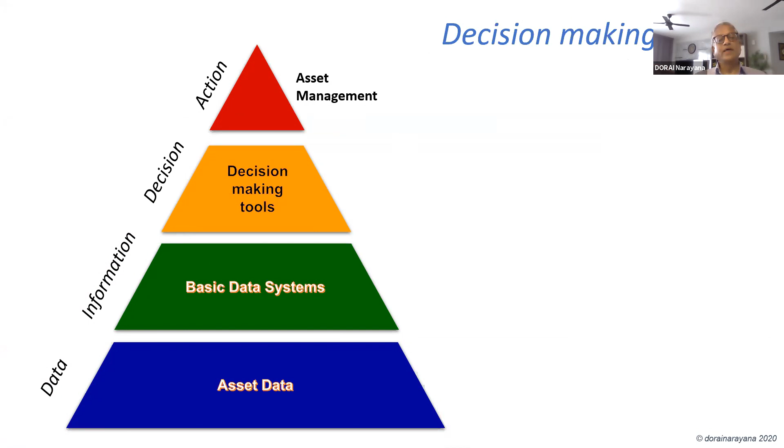And the timing of that demand was coincidental with the enhanced digital capability that also came up because of technological improvements. And then the journey that followed is this. People had this decision-making challenge of taking all this data that was available and having some kind of a data system to organize it and present it in a way where you could make a decision. Then some decision-making tools were developed, and that helped them to make the decisions and move on to action.

But several issues cropped up. Data was not fully available as they wanted, so there were a lot of gaps in the data. And there was also data that was not complete, or that was not reliable. So they had these shortcomings. And in that, they started to look at data acquisition, and that again costs a lot of money.

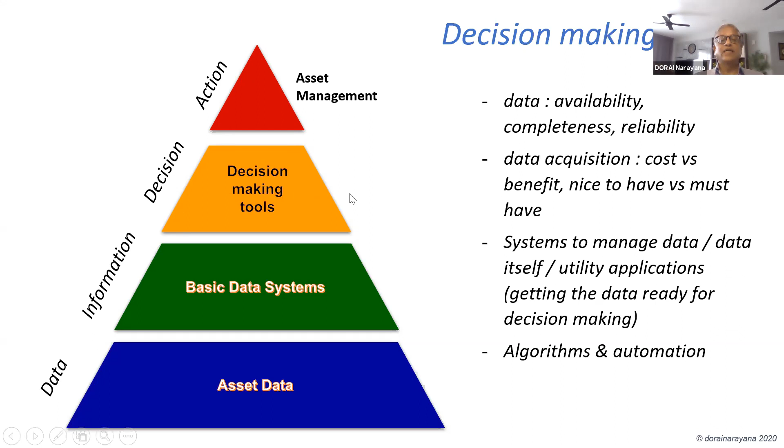So they had to make a call. Do you want to have so much data? Is it worth spending the money to do it? And then they start differentiating between what they must have and what is nice to have. Then they started developing systems to manage the data and utility applications, getting the data suitable and ready for decision making. And of course, the final steps were the algorithms and the automation that then resulted in either the decisions or the action.

And this was a journey that I also went through in the organizations that I worked for. Initially, it was basically transferring the available information from traditional media, paper, drawings, from people's memory into some kind of digital media, scanning, digitization, and so on. Next, there were systems to acquire, manage, and transmit this information where required. Some analysis tools, and then linking and integration of different types of information, different types of databases.

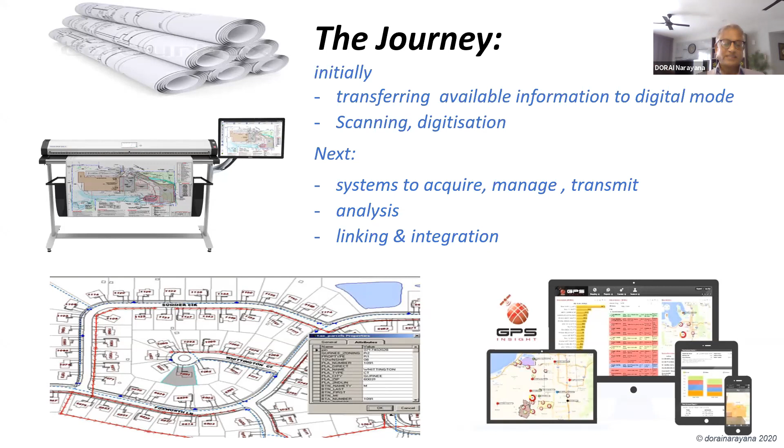And then it became much easier. You could search and retrieve what you wanted quickly. You could send the data to the remote locations where it was required. And there was also the possibility of visualization, so you could present the data in such a way that it could be easily looked at and make a lot of sense to the user. And this is an example of a GIS map of a sewer network.

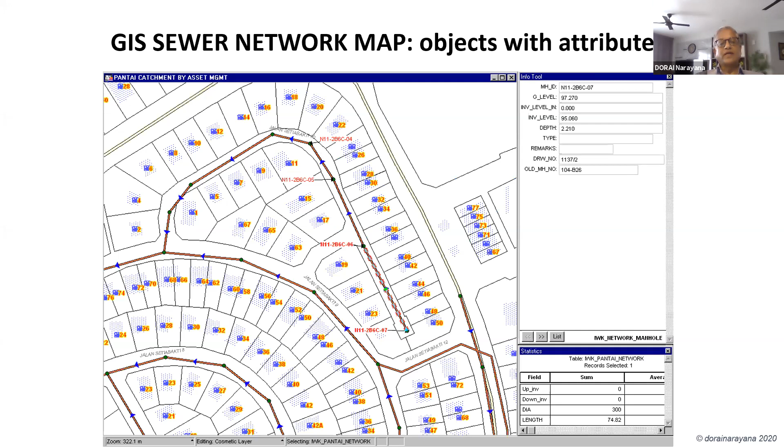As you can see, there are manholes and pipelines and also houses which are connected, house connections. And you could click on some of these to get attributes. You find out what the diameter of the sewer is, what material it is, and things like that. So this was a basic form of a tool to visualize the data instead of it being in a table form. You could also have GIS in the form of layers, split that information into different layers and overlay them in different combinations. And these become a useful tool for planning.

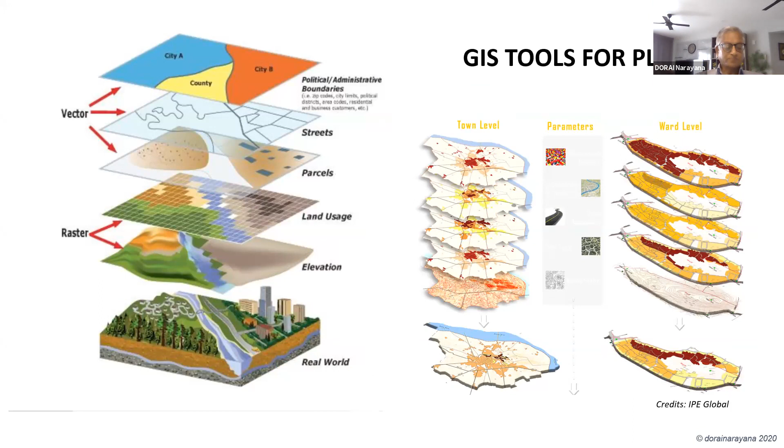Now, from the silo organization of this information, they started linking this map-based data to other data. For example, in our organization, we had asset information on all our sewer lines, our sewage treatment facilities, and so on. Maintenance information on our equipment, on our sewers, billing information, customer complaint information, performance data. All these databases, which existed in silos, got integrated together with the GIS map and made available to different users in formats more suitable for them.

And when we did this, we started finding gaps in the data, some information we'd like to have, which makes the information insufficient to make the decisions you want. Then a data acquisition stage takes place. For example, what is happening inside the buried sewer pipe. So we have CCTV, a camera which is sent through the pipeline to gather information. It records a video, and that information is then translated into a form which makes sense for the decision maker.

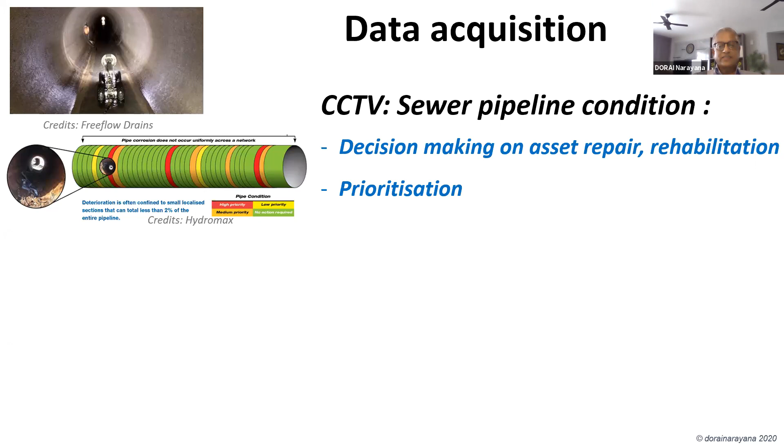In this case, you can see it's a condition assessment format where the red bands are where the sewer pipeline is undergoing some degradation, cracking, or structural issues, and the green ones are those which are okay. This makes it very easy for the person to visualize this information and make decisions from here.

Then we have underground utilities, which again are hidden, and these are required for construction and also future maintenance. These are gathered using various technologies like electromagnetic techniques, ground penetrating radars, lasers, and other things. And then a three-dimensional underground visualization is possible.

Nowadays people are also using BIMs, which are building information models, to see an underground model of the area that we are interested in, to see what is below the road. So these were all data acquisition tools.

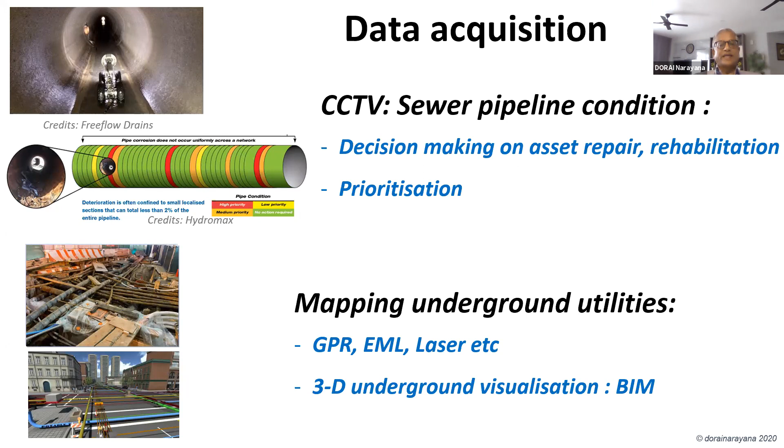Then it also became possible to transmit information using wireless technologies. And that meant that unmanned sewage treatment facilities which are remote could be linked up with some sensors at the key locations, key processes, to a centralized control point where you could get an early warning of anything that is not working right or anything that may need some adjustment, and the team could be sent there instead of having the team there all the time.

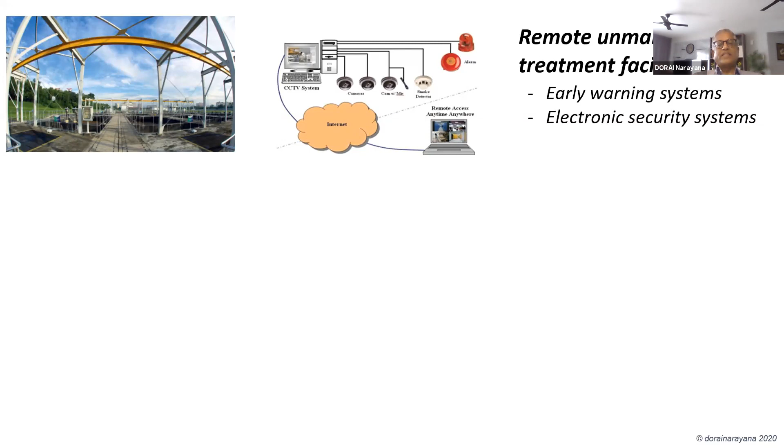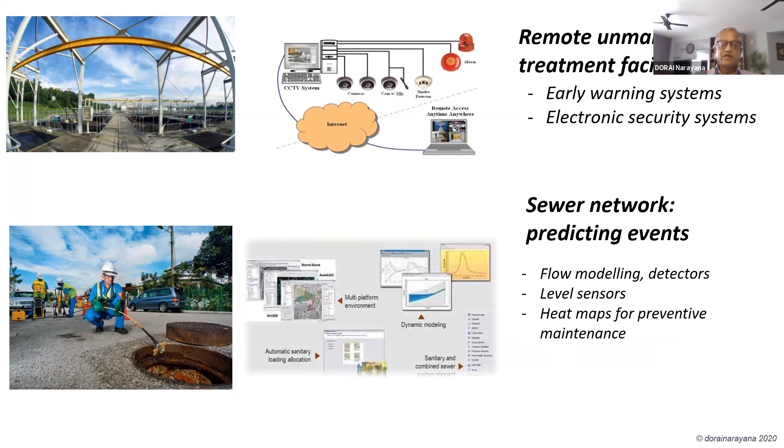Electronic security to alert on possible people who are going in there, unauthorized entry or maybe theft. So these are also possible here. And the sewer network again has similar. So you can have a level sensor, and from there you can collect information about flows, blockages, and things like that. And over time, as we get more information about the possible problems that are happening, you can develop a heat map. And these heat maps will show the priority for preventive maintenance of your sewer network.

For process control efficiencies, there are several technologies which have been used, SCADA, which are remote controls, dissolved oxygen meters, flow meters, and so on, which are able to gather data on a continuous basis, and some process automation can then be carried out, where the algorithm decides to adjust process parameters and so on. And real-time performance monitoring is also possible.

In the case of Malaysia, we have a very large number of small sewage treatment plants which are dispersed all over. And we had come up with a risk monitoring framework using various criteria. And from there, an asset risk monitoring map could be created. And then our operational focus can be decided on that basis, which are the plants which are most critical and which require more attention, and which are the ones which can be left to run with some minimal supervision. And maintenance strategies, preventive, predictive, and even now prescriptive maintenance is possible based on the parameters which are being measured. And our CapEx plan can be adjusted to give the maximum impact to the performance of the asset portfolio.

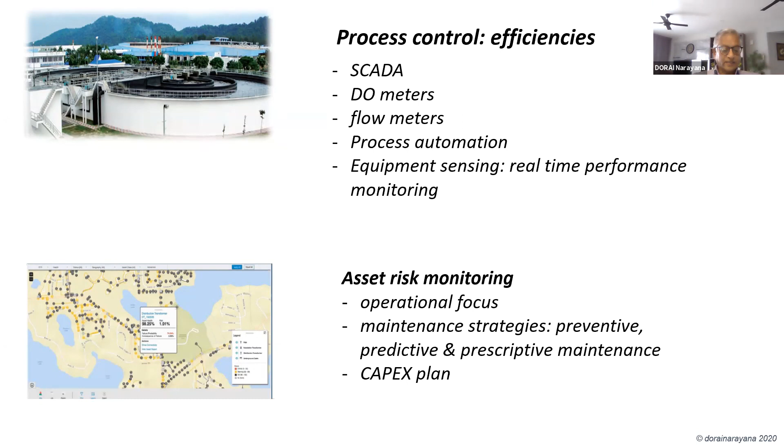Customers are also linked to the assets. We know which customer is linked to which part of the sewer line and to which sewage treatment plant. And that enables us to have better communication with the customers in the event of any breakdown or any problems that are likely to affect that customer. The communication could be sent to the concerned customers, and some preventive methods could also be carried out. Our billing strategies could be improved. So this has helped by having this method of linking customers to assets. And this was an initiative that we carried out.

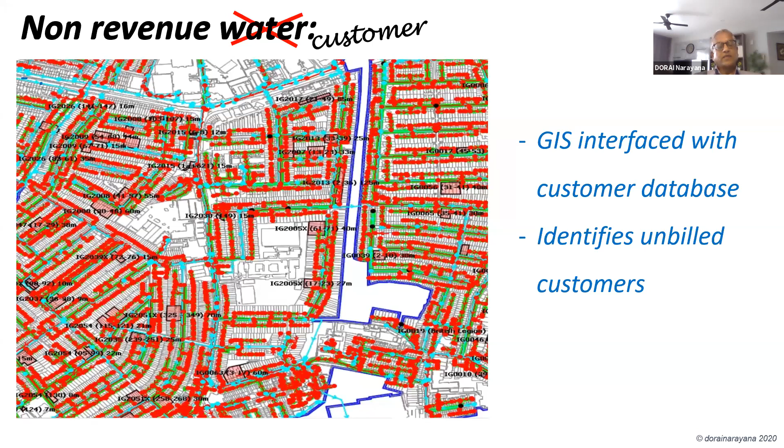We all have heard of non-revenue water, but we called it non-revenue customer. And these were customers who were receiving service. They were connected to the system, but they were not in the billing database. So a GIS system of the service area overlaid with the customer database can identify which are the customers who have been left out of the billing process. So this resulted in many millions of unidentified customers being billed, and the revenues were quite substantial as well.

And we have now also included service request systems where customer complaints and service requests are routed through a call center, and from the call center, automated work orders are sent to handheld devices which the work teams at the respective sites are holding. And the workflow of approvals of those processes, as well as any resources that are required, manpower, materials, and so on, are also done online through that system. There is also a process of escalation, where when the problem is not solved within the allowed time period, it escalates to the next level and so on.

There is a feedback or closure loop again, where the customer is informed when the problem has been resolved. And also from here, the history of events that are taking place in that particular asset or in that particular sewer network, for example, is also being compiled. And this can be used for the purpose of planning future maintenance strategies.

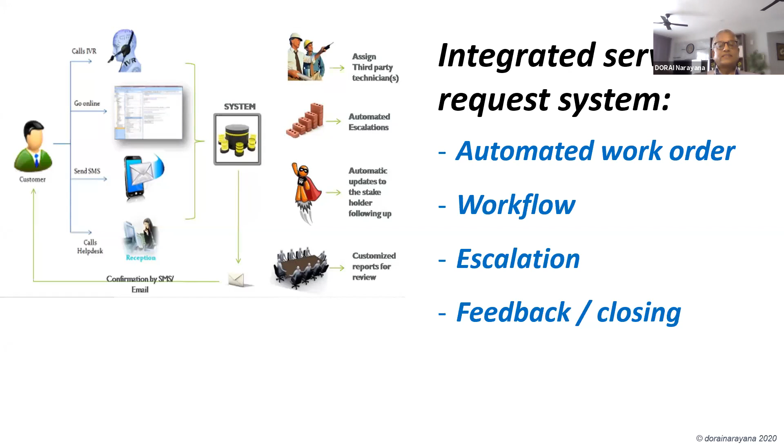Plan submissions for approvals are now in the process. Online approvals are being introduced where you don't need a paper submission, but this can be done online. And this is, of course, much faster and easier. And there is also reduced interaction between the submitting person and the personnel involved. So transparency and integrity are enhanced here.

Moreover, the dates of submission and the processing are all available to the public, and the public is able to view the status of their application, so that becomes a much more transparent process. And of late, for large projects, submissions are also in the form of building information models. These BIMs are three-dimensional models which are submitted, and those become a permanent record for the assets and can be utilized throughout their lifetime.

Another thing the utility did was communications, which traditionally had been through newspapers and TV and so on. Now they started using Facebook, Twitter and other social media to reach out to people. It was much faster, much more effective. For procurements, systems like e-bidding and e-auction have been put in place where contractors and vendors are registered and they're able to put in their bids over the system. And evaluation, approval, and awards are also being done through that.

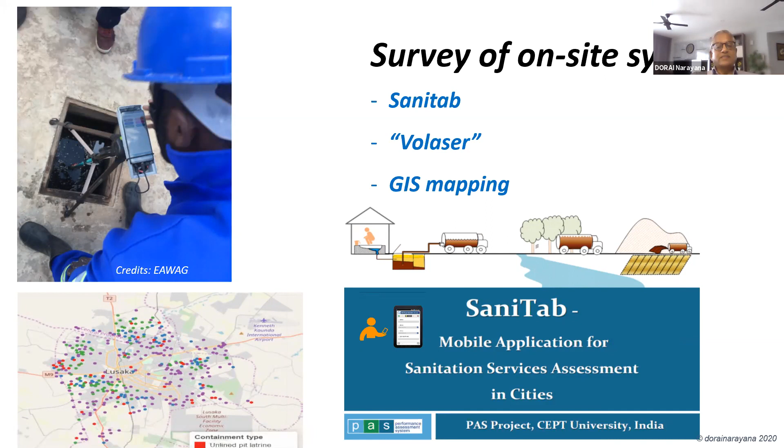The FSM tracker, this was again developed by a partner in India, where the tankers which are used for fecal sludge transportation are able to register, and you know where exactly they emptied, where they are taking it, who's the tanker, and things like that.

And there is an FSM toolbox which has been developed with support from the Bill and Melinda Gates Foundation, which has got many, many tools which are all related to fecal sludge management, right from the containment to the transport, the emptying, treatment, and reuse. So these are all freely available tools.

This is a tracking tool which actually works with the desludging truck having a GPS, global positioning system, which then transmits to a centralized location, and we can see where the truck is going and things like that. And in Malaysia, in the utility I work for, they actually implemented this, and they had an enhancement where there was an additional sensor placed on the pump in the tanker, so that you could not only see the position of the tanker, but you could see when the pump was switched on and when it was switched off.

So initially, the purpose of this was to prevent abuse of the tanker by the workers, where they could use the tanker for unauthorized emptying or unauthorized disposal of the collected sludge. But later, they found that the information that's being collected could also be used for routing of the tankers, and also to measure efficiencies of the team and to benchmark productivity. So the same information that was being collected can now serve more purposes.

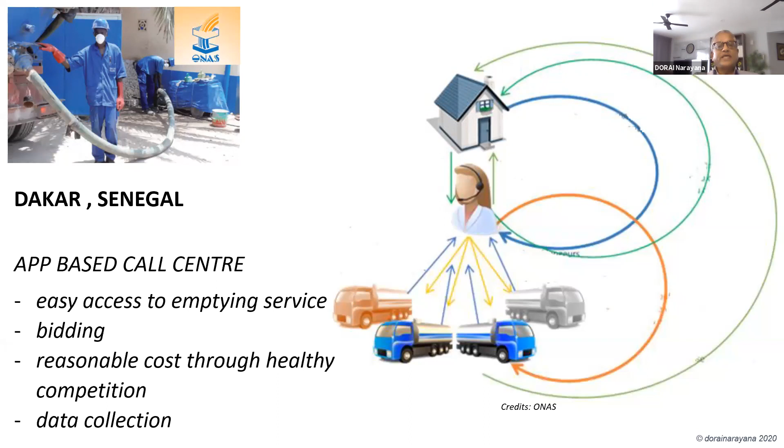Now, this is another model which has not been done yet, but there's a proposal. So it's a Groupon model. If you know what Groupon is, it actually relies on the efficiency of a group purchase. So if we could do a zonal emptying regime for a city and divide the city into various zones and say, okay, now we are offering emptying service in this particular zone at a discounted price. And anyone who takes advantage of that enjoys the discount. So this might be possible through the online technologies which are now in app form. So again, that's not been tried, but this is an idea which I have also proposed somewhere.

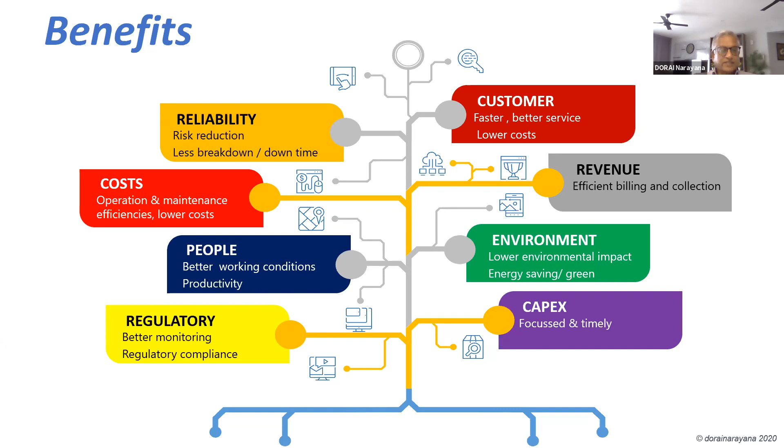Now, the benefits for the on-site systems are also similar, but a lot of times the on-site systems are at a very basic level. They are still in their infancy, and so their concerns are more to get things started and to get some private sector involvement, but not so much to improve efficiencies or to improve customer service. It could be partly, but basically I think they are at a much more basic level of benefits, but they are quite similar, and eventually these benefits will be similar.

Now, as we can see, the need to manage sanitation is a worldwide thrust, and to do it efficiently will drive the transformation, and digital technology will offer the means. And the community expectations and demands are increasing day by day, while the infrastructure that is being used is also aging day by day. And all this means that business as usual cannot be an option anymore. And we have to use every possible tool to improve the efficiencies that we can achieve.

So is technology the solution? In my opinion, and also in my experience, I find that the technology is the easy part. So getting the tool, getting that analysis tool for the digital transformation, that seems to be the easy part. Data could be a big challenge.

Getting the correct data, getting complete data, getting reliable data on an ongoing basis. That will be a very big challenge. And if the data is not good, your decision is not good.

And the requirements: you need to have people who really understand what they're trying to do and what is the transformation that they want to achieve. And that will then drive their requirements, and that will then drive what data they require or have and what analysis they want to do. And of course, this is an incremental thing that you keep improving as you go along.

Now, another jump of 15 years to the current situation. The situation has changed very much because AI is now everywhere. I'm sorry that this is in German. This is the hour of the AI companies, and it shows how Google DeepMind, for example, and other big companies are taking everybody from the market who is able to do AI. So all the scientists and students are getting employed by the big companies because they know that in AI in future the value is in the application of artificial intelligence.

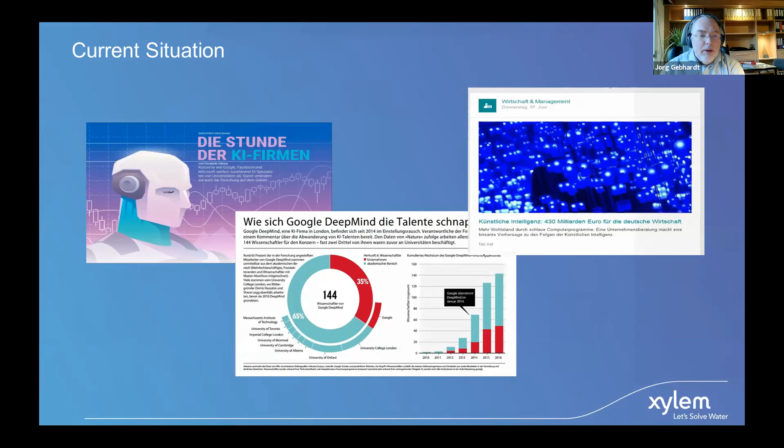So the situation has changed a lot, and Xylem, the company we joined, as Mai said in the introduction, in March last year, also recognized that the digital realm is the area where you earn the money in the future. So we joined them, and now we are rolling out these applications worldwide.

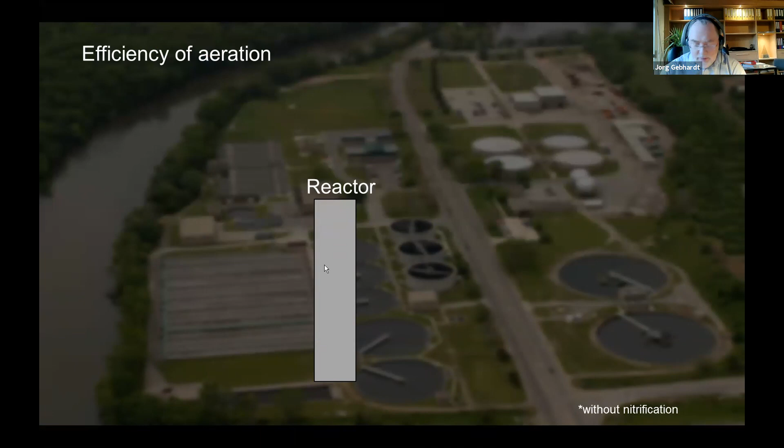Before I start to explain how this works, I would like just to talk a little bit about the process. One of the processes that we are providing solutions to is the activated sludge process, the most commonly used process in the treatment of municipal wastewater. You have a reactor where the biomass lives, and in order to do its job, you have to provide it with oxygen. The numbers here come from a big plant in Germany. It's the wastewater treatment plant of Hamburg, where we apply about 27 tons of oxygen to the reactor.

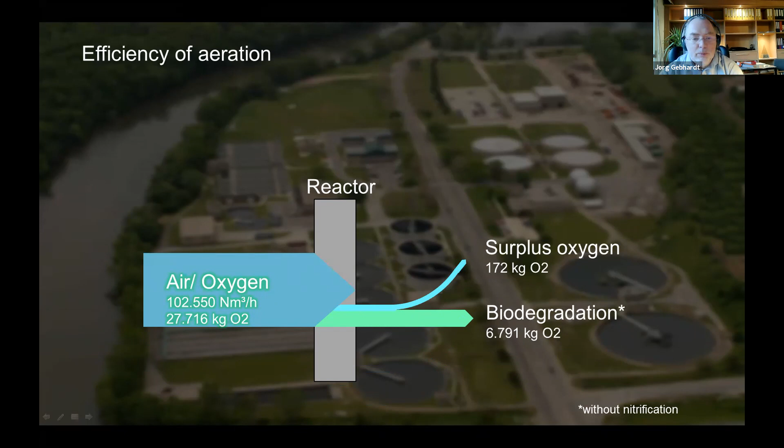Now you can calculate that about 6 to 7 tons of oxygen go into the biodegradation, into the elimination processes. The surplus oxygen is only about 172 kilograms. You can calculate that from a set point of 2 milligrams per liter multiplied by the reactor size, you get to this number. And now the question is, where does all the rest go? And the answer is it goes into the atmosphere and it is lost. So this is a very big number, and this here is a very big number. And the surplus oxygen is just a very tiny little value.

It's only 172 kilograms. But this is the parameter that is usually controlled by the automation and SCADA systems. And automation and SCADA systems are state of the art. And DO control, dissolved oxygen control, is the most commonly used control scheme. And if you control this, then the parameter that really is of interest to us, the specific energy, so the kilowatt hours per kilogram of load that you need, changes by more than an order of magnitude, and it's completely uncontrolled. So you see that this process in nature is very inefficient, and there's a lot of opportunity to improve this.

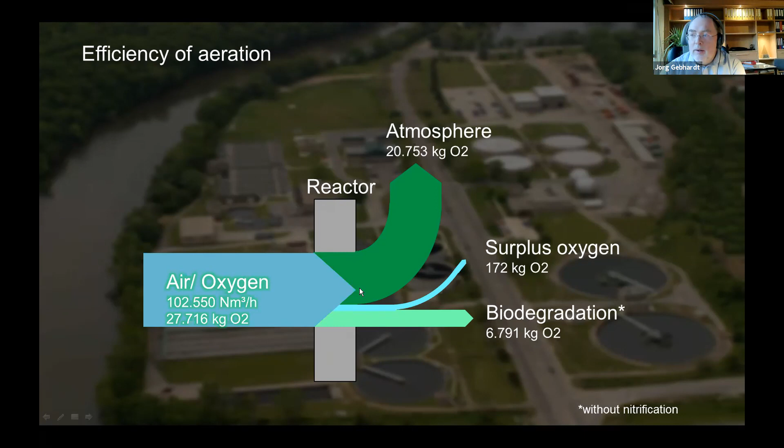Now, how do we do this? We do this by a three-tier approach. Tier one is, as we call it, turn on the lights. That's data collection and real-time alerts and the SCADA integration. So that's the point where the data sources are. Like Dora was talking about, there are many sources. In our case, most of the data comes from online sensors and from laboratory samples.

Then from the data, we create a digital twin, a model. In our case, this is an artificial neural network. And the reason is that the learning or the design of the model is a machine-based process. It's not an explicitly designed system like, for example, fuzzy logic, where you have to design all the rules and the membership functions and all this.

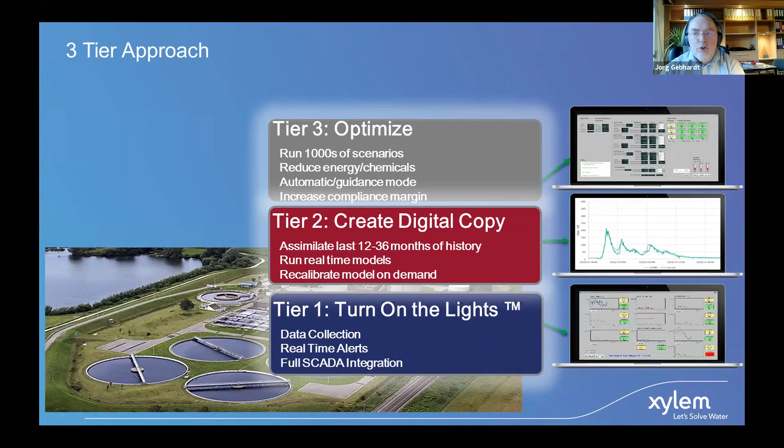It's a machine-based process. A machine will learn the interdependencies of all those parameters that have an influence on the results of your elimination process. And once we got the digital copy, we can use an optimization strategy to make use of it and to generate the benefit.

Now the model, in our case, as I said, is an artificial neural network, and the name, which sounds a little bit like science fiction, comes from an analogy to nature. We know in nature that the biological neurons, you can look at them in a very simplified way, like being a CPU with a number of signals coming in, with synapses where the signals are weighed, and in the core there is some kind of calculation or reasoning being done, and then the result goes out via the axon to all the other neurons.

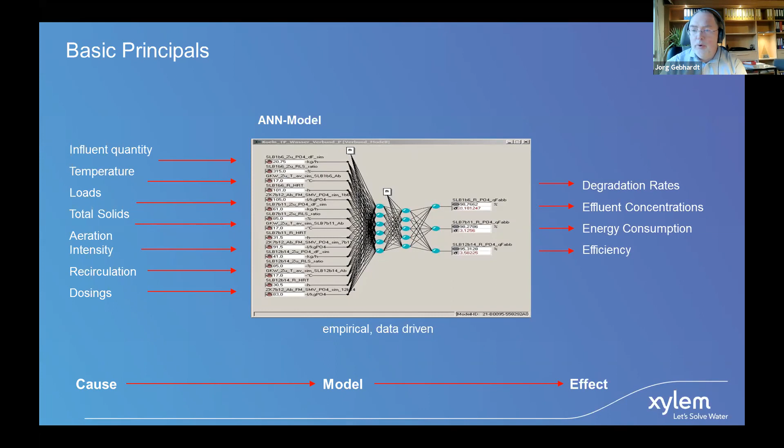As long as it's a technical process, it has some input data and some output data. And there are some input data that you cannot influence, like, for example, the incoming loads or temperature or the flow of water. You cannot influence that.

But on the other side, you have the set points of your automation system. You have to decide how to adjust the aeration intensity, how to adjust the recirculation intensity, for example, for the denitrification, how to adjust the dosing of precipitants, flocculants, and so on. And if you make good decisions here, then you will achieve your targets in the effluent data.

But this is very complex and challenging, as I said, because there are many parameters influencing your process, and they are all interdependent in a nonlinear way. And additionally, you have high lag times. So if you adjust the aeration here, you will see the result in the effluent many hours later, because the hydraulic retention times in such a process can be as high as 20, 25 hours. So that's very hard to control. And students of control theory really hate lag times, because it's really difficult to cope with that.

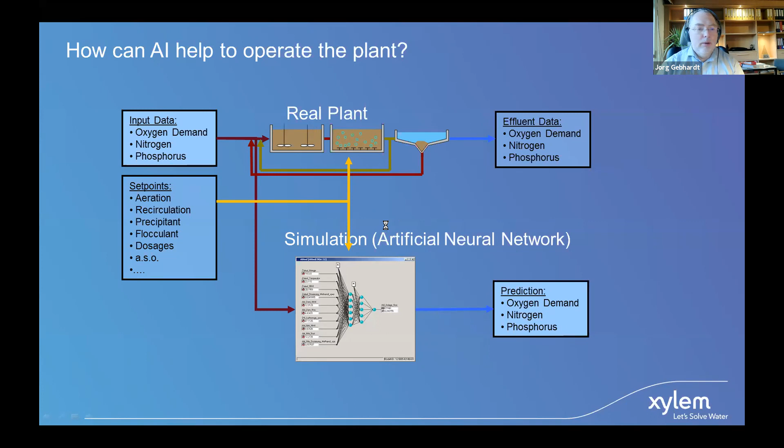But in our experience, in most of the plants, if not all of the plants that we've seen so far, and this is more than 100 plants, oxygen usually is not the limiting factor. Because of DO control, you're always in saturation. So if you have a stormy weather event and concentrations in the effluent are going up, it doesn't help to increase the aeration. On the contrary, it is counterproductive because you have highly oxygen-saturated water that you are recirculating into your denitrification, decreasing the denitrification capability, in a situation when you desperately need denitrification capacity.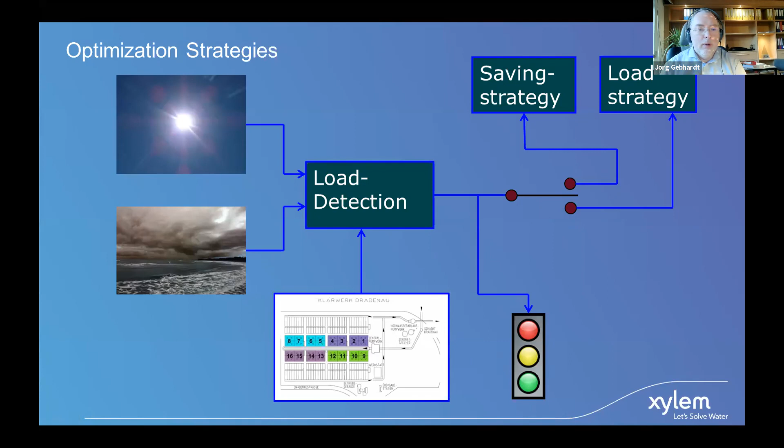Now, what do we deliver to the plant? Where does the software live?

We deliver a standard industrial PC. Most of the time it is delivered by us, but the client can also provide it by himself. And this is a plant, for example, I think that's the wastewater treatment plant of Trier here in Germany. And we have approximately 200 inputs, mostly analog inputs that we use to feed our models, and approximately 50 outputs that go to a graphical user interface to communicate to the client.

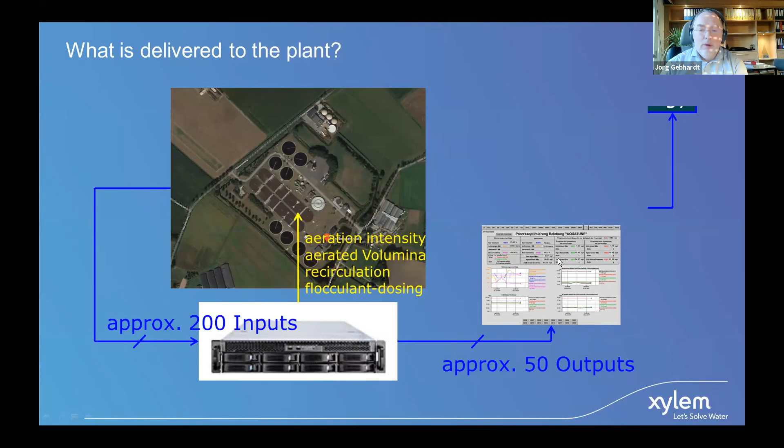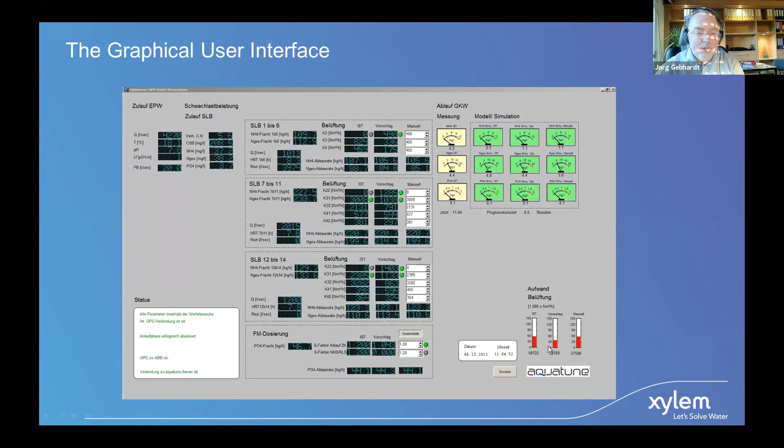And this is just one example of a graphical user interface. The design of this depends highly on the client, how the client is used to design such user interfaces. And I won't go into the details here for timing, just to give you a quick impression of how this looks. Here are some input values. Here you have the values, how the 14 lanes or 14 parallel treatment tanks are adjusted. And here you have the predictions and some display of power consumption.

Another example is monitoring systems, where we use artificial neural networks as what we call soft sensors or virtual analyzers. You see here green curves, which are real measurements, real analyzers, and blue curves, which are virtual measurements. And for example, here in that case, you see a deviation, where the physical measurement is constant, and our virtual measurement is increasing and then coming down, and then they meet again. And here in that case, for example, I would have a higher trust in the virtual measurements, and that's also what the clients find, that the virtual measurements are much more robust than the physical measurements.

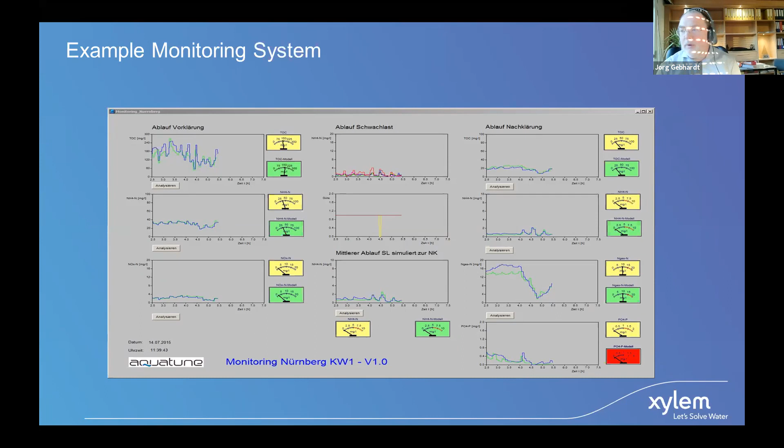Now, one of the key performance indicators that we are using, as I said, is the specific energy consumption, and that's what I would like to show you here. The data is coming from a North German plant called Cuxhaven. I have a case study which I will show you in a couple of minutes, and you see the kilowatt hours that we have to apply to eliminate 1 kilogram of load is varying very strongly. The average is about 0.5, but it can go up to 5 or even more. That's before optimization, using just DO control.

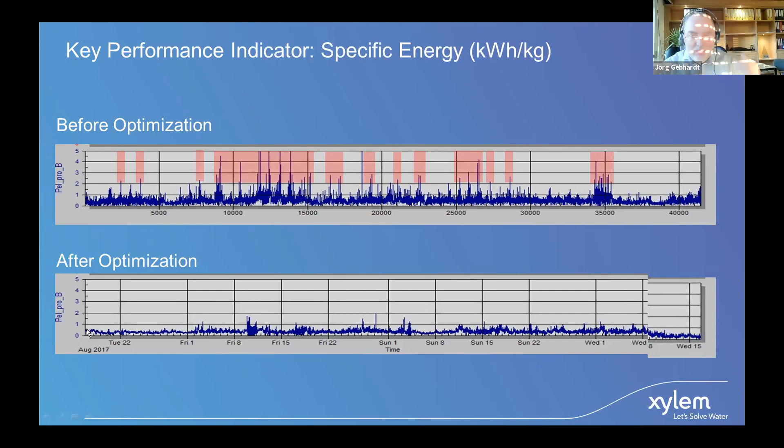Now here you see these peaks of excessive energy consumption. And after optimization, we started here in August 2017. You see that those peaks are nearly gone. It's not a perfect straight line. That's really challenging, but the variations have reduced significantly, and the baseline has come down by more than 25%. So this translates into a saving of 330,000 euros in the case of this treatment plant of Cuxhaven, where we did the energy optimization for 5 parallel biological tanks.

We built models of the carbon, nitrogen, and phosphorus elimination processes, and we calculate the best set points for the aerators and for the recirculations and so on. And another specialty we have here is that they didn't have online measurements in the influent, which is a very common case in medium-sized or smaller-sized plants. And we compensated for that by creating a virtual analyzer. We use artificial neural networks to calculate estimated incoming carbon, nitrogen, and phosphorus concentrations and loads. And so since we applied this system here, they didn't have any situations of breaking the compliance of their values.

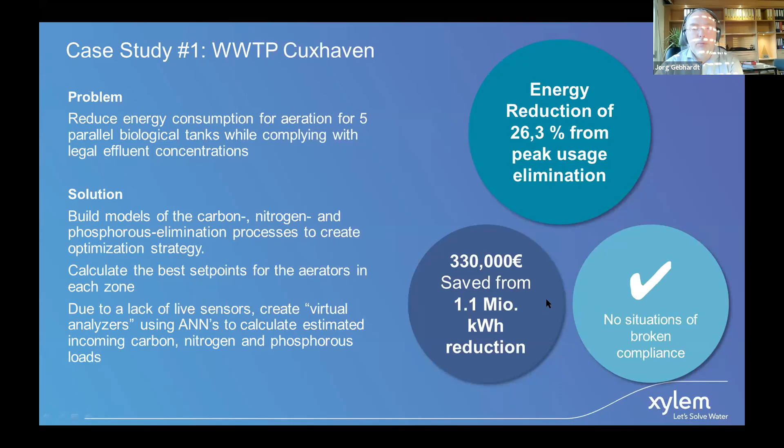Another case study, just to show you a little bit of examples of what you can do with AI in the water and wastewater area, is the anaerobic treatment plant in Eisenhüttenstadt, which is a treatment plant which sits behind a very big paper mill. And paper mills produce a lot of chemical oxygen demand, but they don't produce nitrogen or phosphorus. So you have to dose this into the reactor tanks, because the biomass, of course, needs not only carbon, it also needs some nitrogen and phosphorus to grow and to live. And so the problem here is the dosing.

And here it's not about energy saving, it's more about stabilizing the biomass, because this is a much more sensitive process, and it's not so well understood as the activated sludge plant, which is a very robust and well understood process. So the main objective here is to operate the reactor in a way that they don't lose sludge, because that's very expensive if they have to purchase new biomass.

And yeah, what we did was we built models of the COD elimination process and also of the gas production process. And then we calculated the optimized set points for the dosings, but also for the hydrolysis, which is another critical step in anaerobic treatment. So this is another example, a successful example of the application of artificial intelligence.

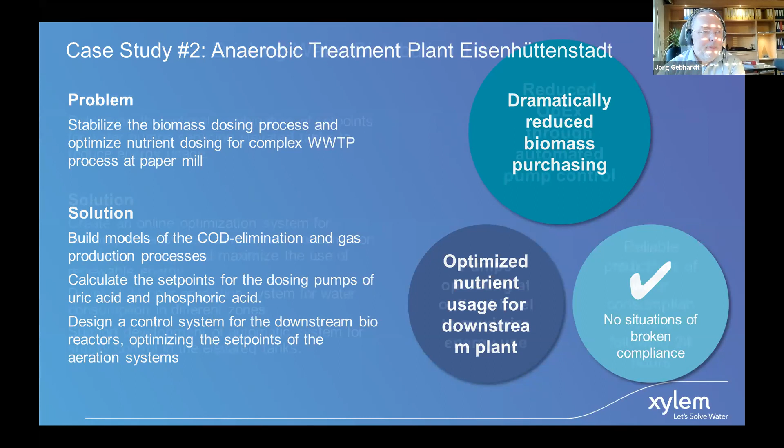And the third and last example that I wanted to show you is an example in a drinking water distribution. This is the city of Trier here in Germany. And they are providing the drinking water to the city. And they're using water from a well field, but also water from a big reservoir. And they have lots of renewable energies like photovoltaic. They have turbines and so on. And they want to make maximum use of this.

And now they have pumping stations that pump the water into high-level tanks, elevated tanks, from where the water flows into the consumption zones. And those tanks with water are in fact a storage of energy, like a battery. You can think of them like a battery, because water at a high elevation contains a lot of energy.

So we use those tanks, we manage the levels of the tanks by operating the pumping stations to decouple the profile of consumption, which is determined by the people in the municipality and their behavior, and the profile of availability of renewable energy, because they want to draw as little energy as possible from the grid. And so to decouple those two profiles, you need storage.

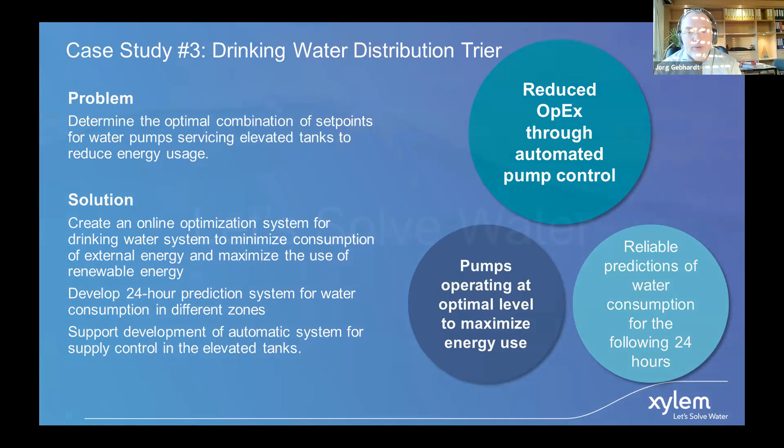Thank you, Jörg. You're welcome.

You mentioned in one of the case studies that there was a savings of 300,000 euro. That's right. How large was that plant in terms of volume? Yeah, good question. The question is excellent, because the saving corresponds directly to the size of the plant. So in that case, I think it was 400,000 people equivalents. So that's the measure that we use here. When we look at plants like Cologne or Hamburg, they have a return on invest of significantly smaller than 1 year. It's only a couple of months until they get the return on invest, because of the big saving potential.

Can you explain a little bit? Because in the case of Malaysia, the sewerage, the whole sanitation utility is separate from the water side. In Germany, is it similar, or is it together? You have both systems. I don't know the exact distribution, but you have both systems. You have mixed sewers, and you also have separate sewers. But the point that I was talking about is the treatment itself. And in the treatment, the situation is very much the same about the savings, because that only depends on the way you do the operation of the plant.